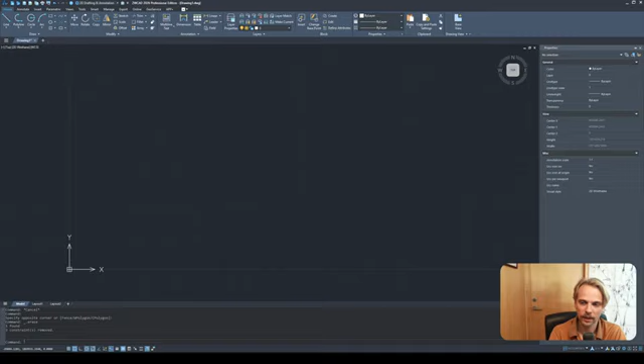It's quite similar, isn't it? The user interface, everything about ZWCAD is really, it makes it easy to transfer, and I know because I have done it. Even the command line, if I type in PL for polyline, enter, we're simply drawing a polyline. The snaps are the same visually, they act the same. Even the snap icons are quite similar, right? If I look at the different object snaps, here are the icons.

So transferring from one software to the other, it's quite seamless. Anecdotally, sending over DWG files created with ZWCAD to users of Autodesk products, I haven't had any issues with that. Neither have I had any issues receiving DWG files from Autodesk products to ZWCAD. It all works. Can't really think of anything that wouldn't work, which is great.

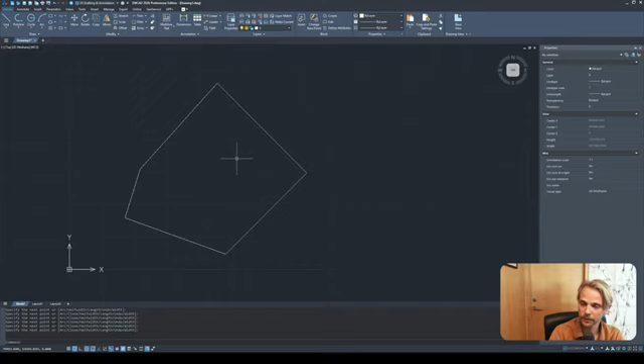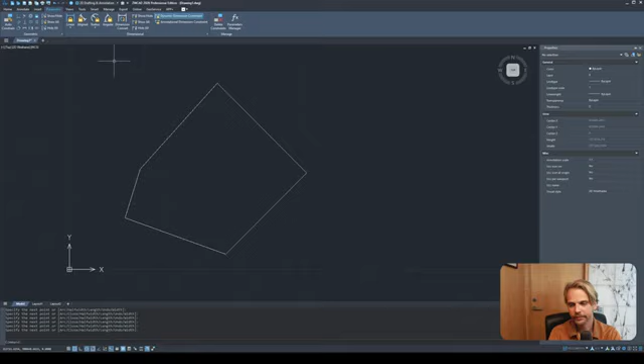When it comes down to more advanced features, there are two things I want to showcase. Feature number one is under the parametric tab, we have geometric constraints - different constraints that enable you to make any drawing parametric, where you can change the values and the geometry adjusts by itself. That is great, that's what we want sometimes. And another one actually comes from the previous course, the Rhino course for design documentation, where the biggest pain point was the lack of dynamic blocks. Of course, ZWCAD has dynamic blocks - they call it FlexiBlock. It's a dynamic block, right? So I'll be showcasing that as well.

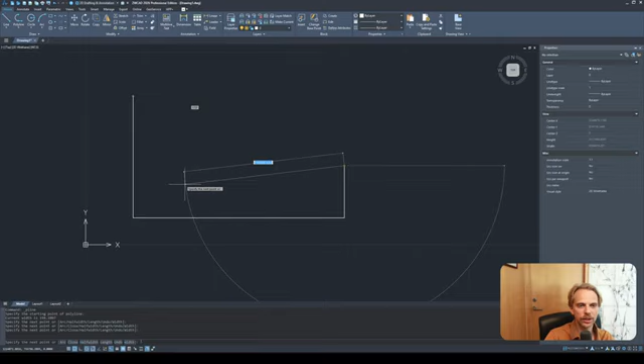All right, let's begin with me showing you parametric constraints and how those basically work. I will not do anything too fancy, too over the top - it's just to show it in a simple manner. So I'm going to be using a polyline, and I'll draw out some sort of an L-shaped looking thing.

You can see that my top here is not horizontal. I want it to be horizontal, so I will go into my parametric tab, and here under geometric constraints I can find the one that says horizontal, so I can force horizontality here. Bam, it's always going to be horizontal now.

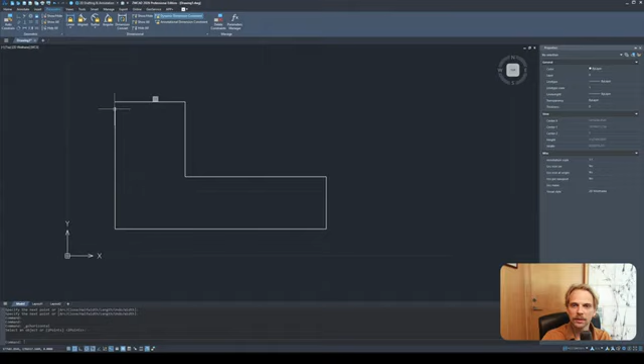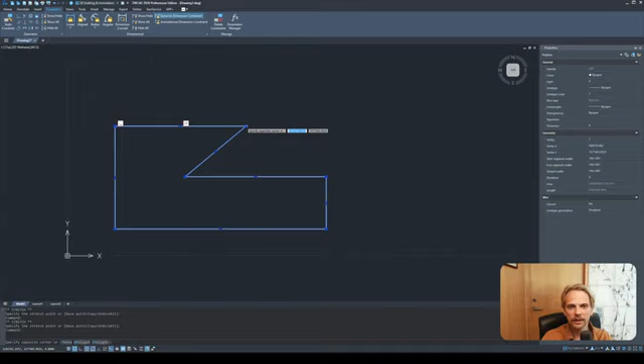Now there's a problem here because I forced this to be constantly horizontal, so it needed to make a gap here. I don't want this to be a gap, so I will use coincident right here between this point and this point. Now, no matter what I do, well, I can't even move this point, right? But yeah, I can move it down. So as I'm moving this point, this line will constantly stay horizontal, while this point will constantly be locked in.

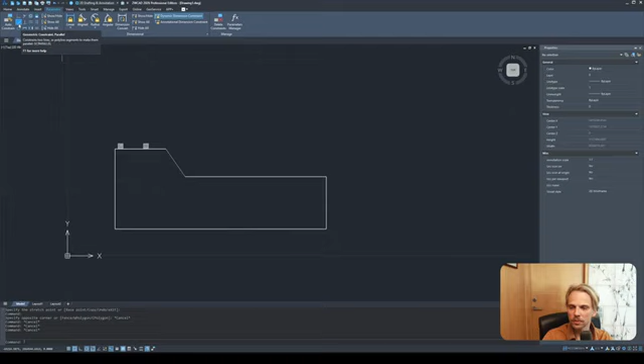So let's say I don't want this line to ever be non-parallel to this line. I want these two lines to always be parallel. I can use this parallel constraint right here, between this element and this element, right? So now these two are parallel.

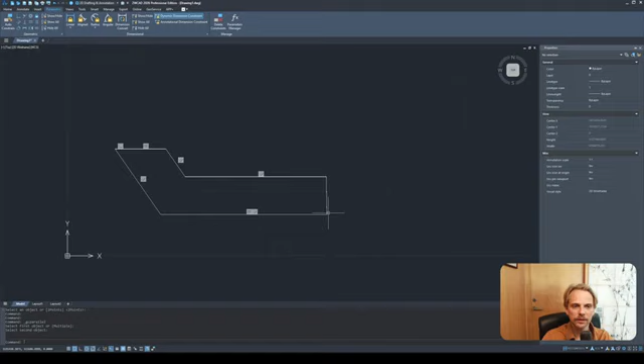I also always want the bottom to be horizontal, like that. And this line right here and the bottom, I always want it to be parallel, like that. And this line I want to be parallel with this line. Okay, there we go. So it became... let's try this again. Control Z from here to here. There we go. It matters which one you select first when you're applying the parallel, or any geometric constraint.

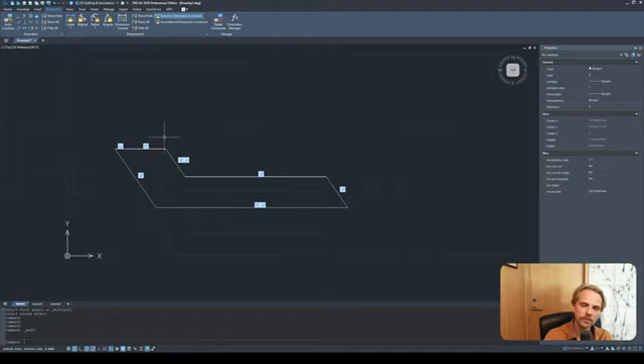But now what I have is a parametric model which will always react to any changes in exactly how you want, how you have described the relationship between the lines.

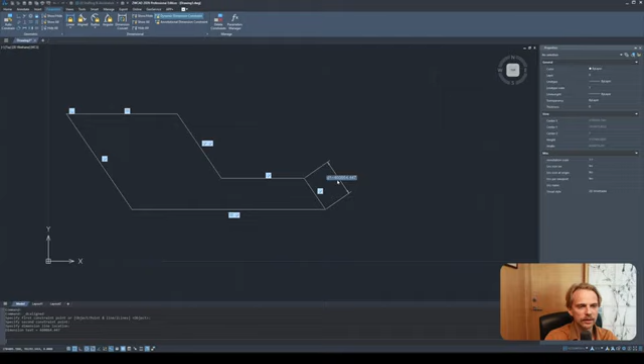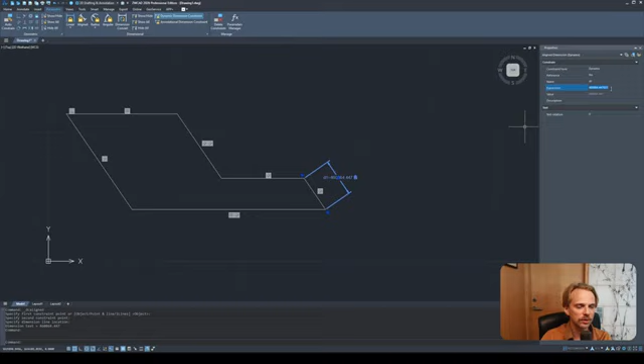You can also have this dimension, right? So for example, if I do an align dimension between here and here, that's my dimension 1, and you can see I'm off scale - this is a bad scale, doesn't matter. But here, if I just hit enter, I have my dimension here. I can actually go into its expression and write whatever dimension I want. So instead of 4, like I should have made a smaller one, this is 460,000 millimeters. Yikes. So instead of 460,000, what if I use 650,000, right? And everything applies, everything kind of works together.

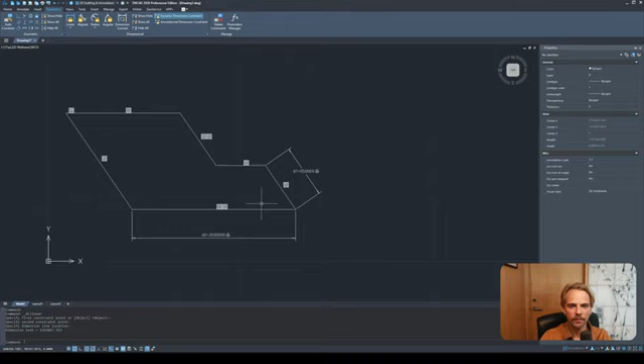Then I can create more dimensions. So I can do a linear dimension between these two points, drag that one out, and I can write whatever I want. In this case, it's 2,365,000. So if I do just 2 million, right? Now this dimension is locked. And basically you can just play around with the dimensions and you can have a fully parametric model where you're just working with these different values and getting different variations of it.

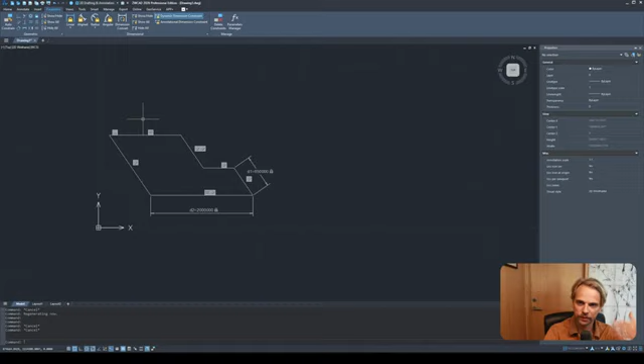Hopefully that makes sense. This is a very powerful tool, a more advanced tool, and I'm sure you already can think of multiple ways of how you can use that in your day-to-day work. So that's one thing - let's move on to creating a flexi block, a dynamic block.

All right, for the flexi block or dynamic block portion of this video, I will do a semi-tutorial. Semi-tutorial means that I will be going fast.

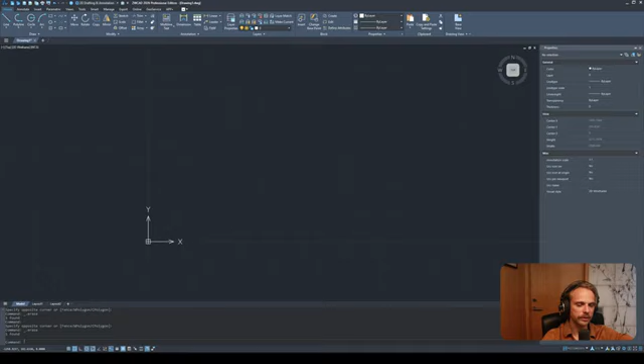I will be going faster than what I usually do during tutorials, just to showcase the whole process and explain it along the way. So it's not for teaching, but me explaining why I'm doing the things that I'm doing, so you can see both the output as well as the strengths of this flexi block dynamic block process or workflow.

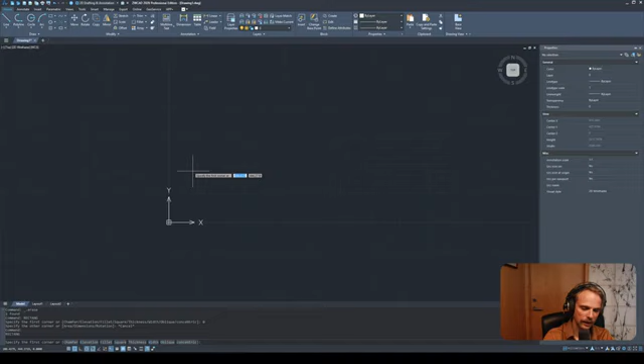So for this, we'll make a table. I will create a rectangle at 0, 0, 1,000, 1,000. So it's a 1 square meter, 1 by 1 meter rectangle.

I'll create preemptively a diagonal line, I will need it later. I'll make a circle, and the circle is going to be my chair, and the radius of it is going to be 250. I'll take the circle, move it up to 300 millimeters, so that there's a 50 millimeter gap here. The chair needs a backrest, like that.

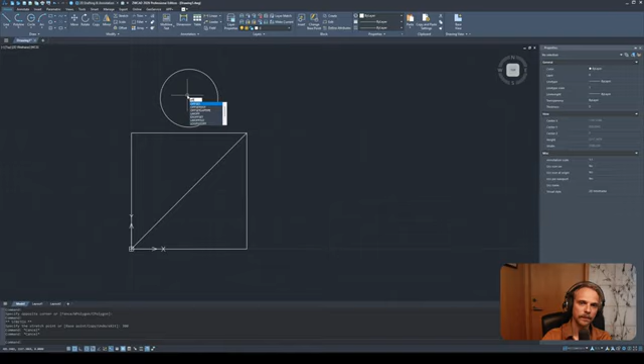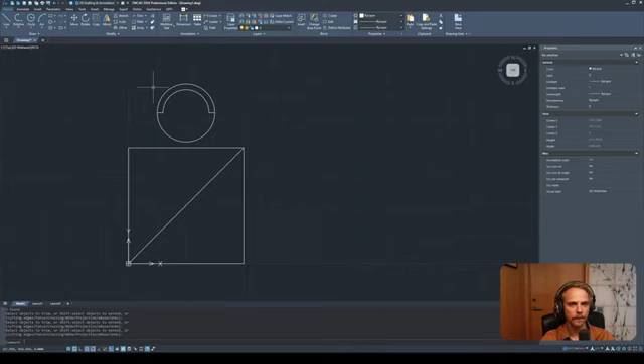So I'll just offset the circle inwards 50. I don't know why I did that, it was already 50. I have that, and I'll use the line tool, snap to quadrant, using quadrant snap to the circular quadrants, select all of the lines, trim, TR, enter, and trim away the excess, right? So now I have a chair.

Simplistic chair. Then for the table, the reason why I have this diagonal is if I select the chair now and I use array polar, I can use the midpoint of this diagonal to rotate or polar array the chair around the table. As long as I choose 4 items, it's going to be fine.

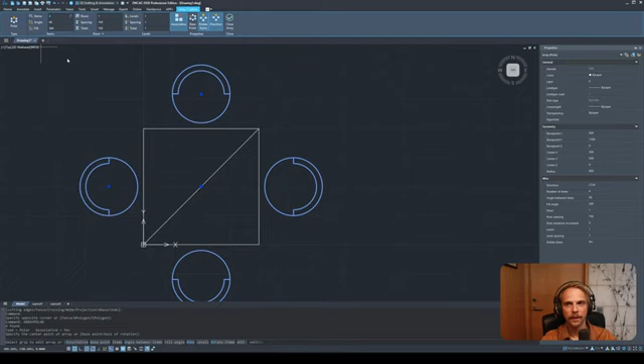Hit enter. Okay, there we go. And then the nice thing about arrays is that they are remembered in ZWCAD, so you can adjust the settings for them even after you have finished the tool. So if I want 8 chairs, I can just change it up, which is nice.

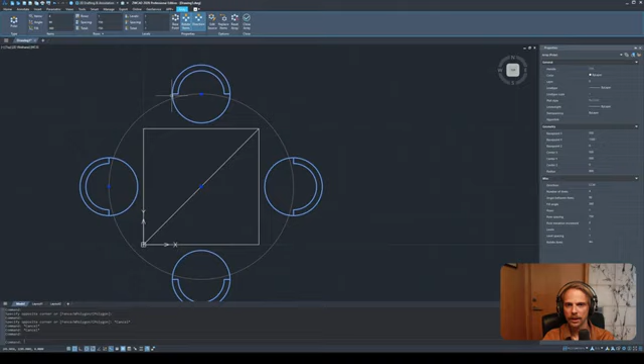Not for this tutorial or showcase, but for later. For now, I don't care about the arrays. I don't care about the array being editable, so I'm going to explode. And if you explode the array, you're left with just separate items. Don't need the diagonal anymore, and the corners are a little bit too sharp, so I will use fillet

on the corners with a radius of, I don't know, 50. I'm using 50 for everything, might as well use it for the corners as well. There is a fillet corners tool, I believe, that you could use, but whatever, it's just for corners, so I can do it manually. Okay, now with this, I can make it into a block.

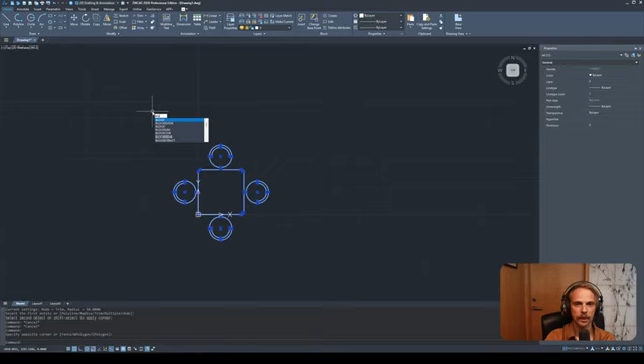So I'll type in block, and I'll call this table. Hit OK. For me, it says that it exists because I was testing it out. For you, it will not. And now this is a table block that has no parameters, no nothing.

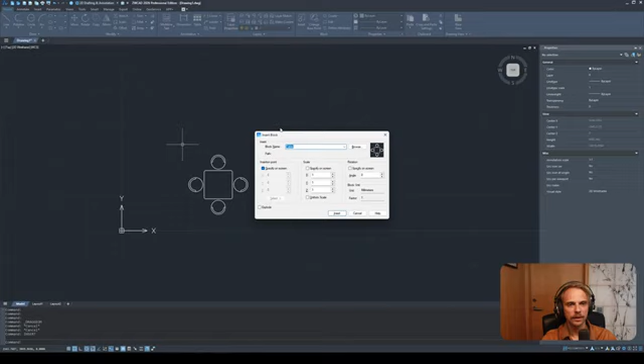All you can do with it is move it around. Move it around, there we go. You can insert, and there's the table. Insert, pop. You can place it, but scale it, rotate it, right? That works. Rotate, but nothing more. This is how it is in Rhino, right?

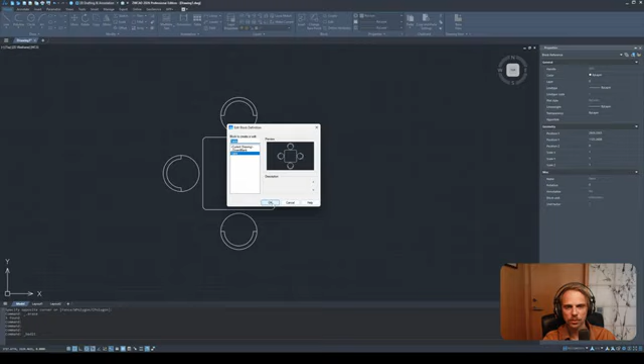But now it gets interesting. If I go in here into my table block, I just double click on it, or you can use the edit tool. If I go in here, I can start adding in different dimensions. And let me just move myself over here because you might need to see this.

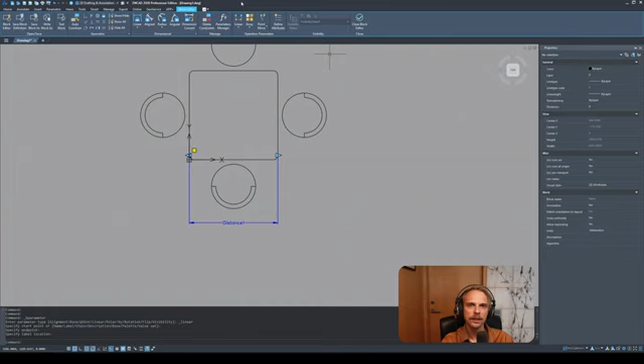So for example, I can add a linear parameter from here to here, which is the length of the table, right? Expand it up to here. It says distance 1, I don't like the name of it, so I'm going to go to the parameters manager here, and distance 1 I'm going to change to table width. Table width, and expression is set to be

1000, which is actually the current width of the table. That's great. If I close the block editor, save changes, and select the table here, you can see that now I have a parameter called table width, and it's 1000. It's grayed out, I can't change it, unfortunately. We need to do more editing here.

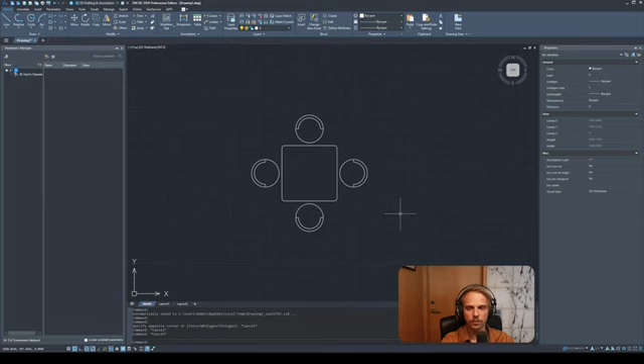If I double click this, I hit OK. First step is to actually—no, let's make it editable. So I'm going to expand this parameters tab where it says, in your case, it might say move; in my case it says array, it doesn't matter. But I'll choose stretch. And it's going to ask me what's the parameter that should be stretched, or the anchoring parameter. I'm going to use table width.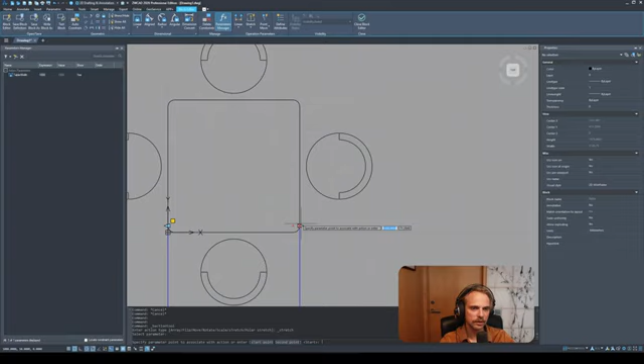Then it asks me to give it an area which you grab onto stretch, and the area is going to be this table edge, right? So I'm just going to—first of all, the point is here, and then it asks me for an area. So it's as if I'm drawing a rectangle like that.

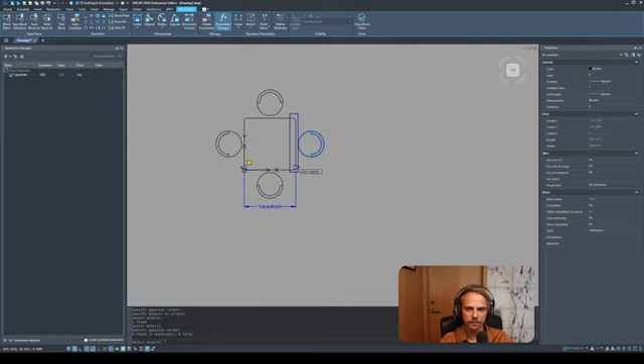And then it asks me what are the objects that you want to stretch. I want to stretch the chair so that as I'm grabbing this arrow and moving it, the chair kind of moves with it. And I also want to stretch the table, only part of it, so it's only going to grab these control points here and here, so it stretches the table. Once that's done, hit enter.

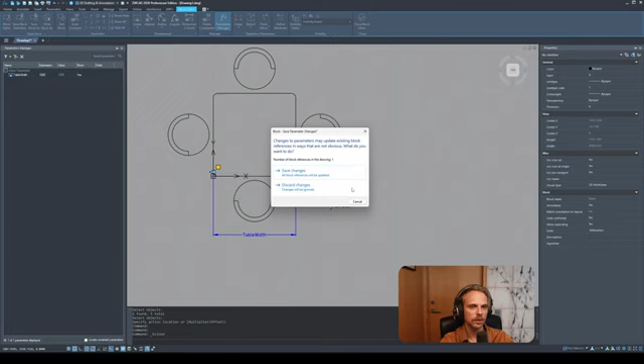It asks where to place the stretch icon if you want to edit this anytime later, so you just place it wherever. Close block editor, save changes, select this. Voila, you can now stretch this.

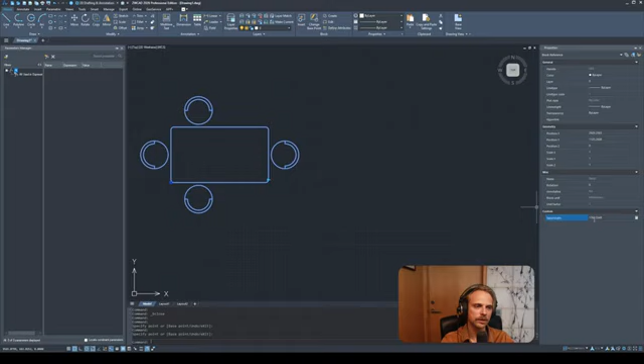As you're stretching it, you can see the table width parameter is also accessible now, and you can type in whatever number you want. The problem is that sure, it's stretchable, but there's not a lot of tables that have 1767.5549 millimeters in length. So it's a little bit annoying without any snapping.

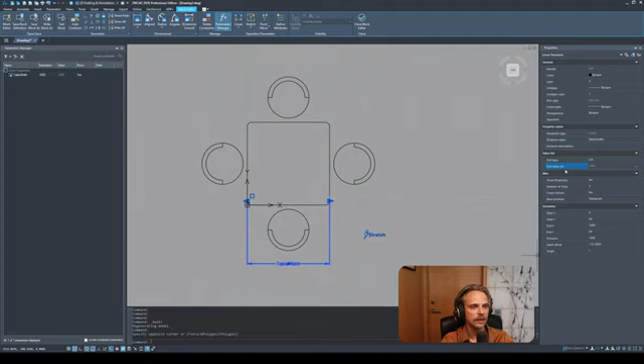So what we want to do is have a library of lengths that you use. I'm going to go back into the table settings, or table block editing mode, and select my table width parameter. Under the value set tab, instead of distance type none, I'm going to choose list. And for the list, it says 1000, but I can click on these three little dots here and add more.

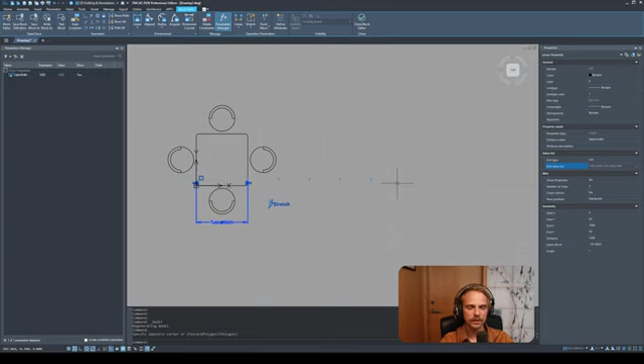So I'm going to add 1600, 1.6 meters, 2200 - using a step size of 600 - 2800, and then 3400. That's enough, hit OK. And you can see these tick marks appeared. Close block editor, save changes, select this - now it snaps to these values.

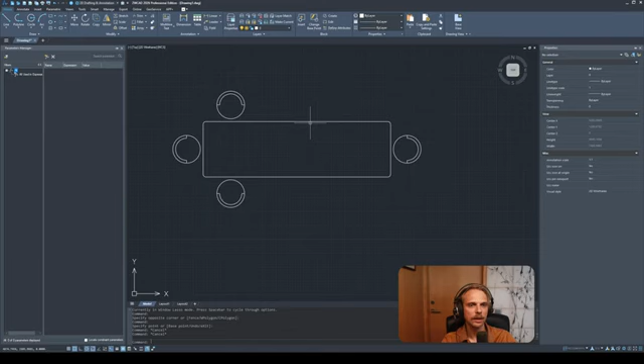Great, parametric - well, semi-parametric. Now the only thing left is making sure the chairs also get multiplied, so they follow with the snapping. So let's double click again, hit OK, and we need to add one more parameter or operation.

Instead of stretch, if I expand this, there's the array - that's what I was testing, by the way. So the array parameter asks us to select a parameter that influences the array, which is table width, and then asks to select the objects, which is going to be the chair here and the chair here. Those are the only two things that are going to be arrayed. Enter, and enter the distance between columns.

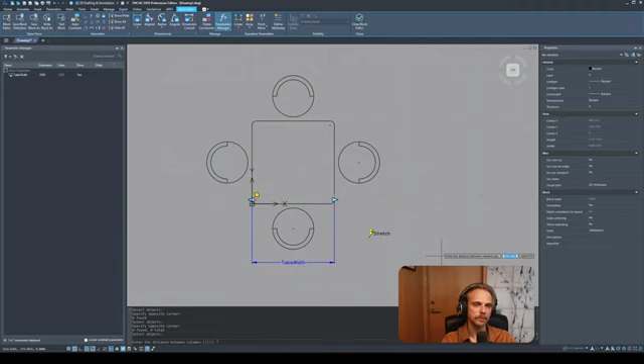So as the table is being stretched, this dimension is also being stretched. Basically, what's the step size between the array elements? I did a 600 millimeter step size, so I'm going to do that - 600, enter - and then all I need to do is just place it somewhere. Now I have access to this setting as well as this setting.

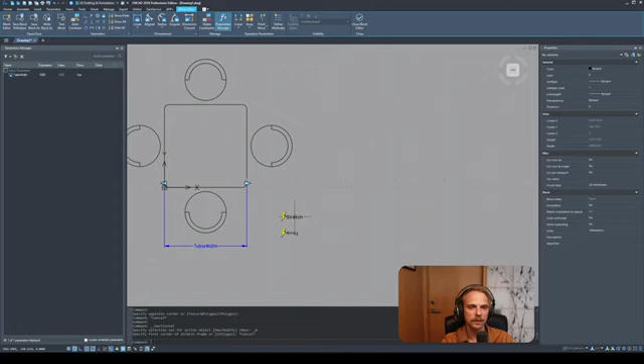Okay, close block editor. I think that's it. Save changes. Voila - 4, 6, 8, and so on. So we have a parametric

flexi block - it's a parametric dynamic block where you can choose from a list of values. You can also, of course, clearly do much more with it.

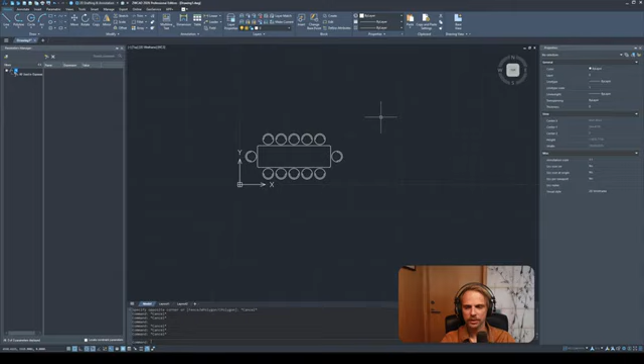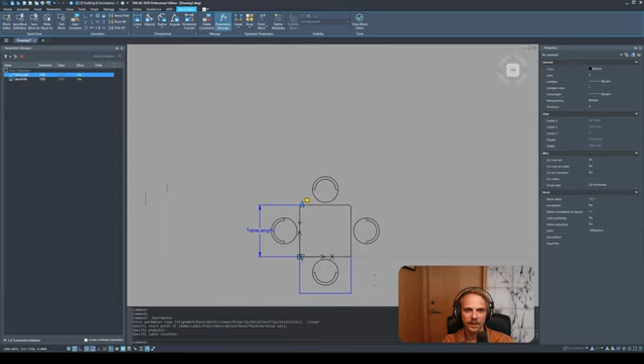Let's go back in here. You can add one more linear parameter from here to here and call this table - oh, then it's table length. It's awkward, my bad, it should have been different. This should be table width, and this should be table length. This should be table width, but it is what it is.

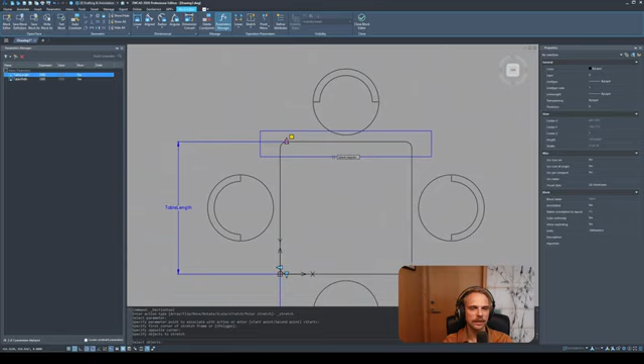So this parameter, and then I can apply another stretch for this table length. I can use the same kind of logic - oh, that's my bad, okay we'll make this a smaller layer. Select objects, so we stretch this and these guys like that. I believe that's it, enter.

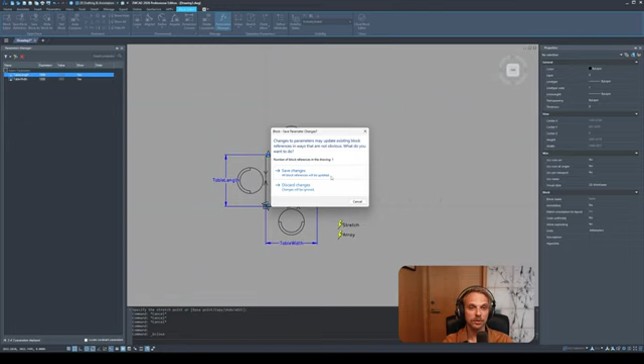Place that stretch, and I'll just place it over here, and I'll edit it, so I can change the rectangle to be here. There we go, something like that. And I believe if I close block editor, save changes, now I have the possibility to increase the size of the block

like that, or decrease it. And clearly, this circle does not react to the midpoint of the table, and you could make it react, but this is besides the point. The point is that you can make everything parametric, which is great. So that's kind of it about the flexi block - that's what I wanted to showcase for this video, but there is still one more thing.

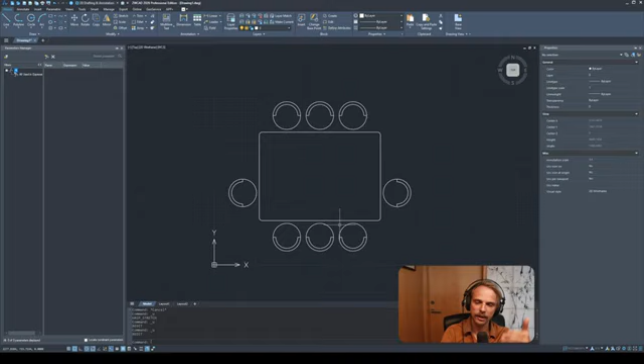Recently, for 2 years now, every year when there's new features of ZWCAD coming out, I always cover them. I wanted to do that this year as well, so we keep track of the development of the software, because I feel like it's important to see if development is stagnating, or if the developers are continuously pushing out new things compared to the Autodesk stuff that is currently stagnating quite heavily. Hopefully ZWCAD will not follow in those footsteps. So let's jump to feature review.

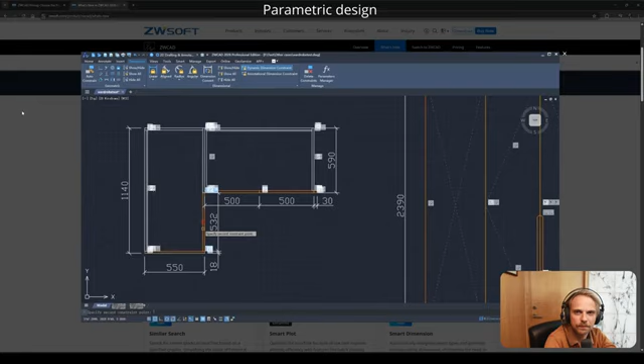I went through all of the features of the new ZWCAD 2026, and there are a few I want to show you that are getting me excited about the new release. So the parametric design one, I already showed you this, but for those of you who don't have a good imagination, this is a much better showcase of the parametric constraints and whatnot. Imagine having a drawing that's all tied together and it adjusts just from you typing in required measurements. Quite a powerful workflow, quite a powerful tool.

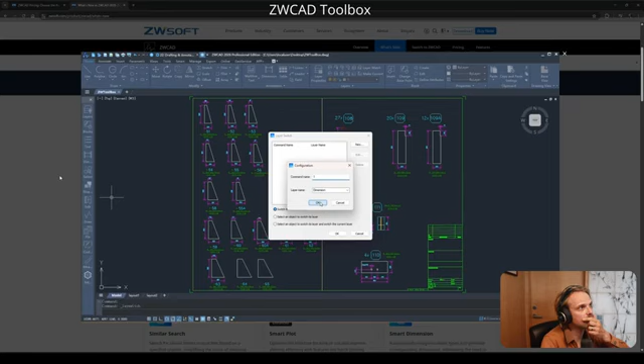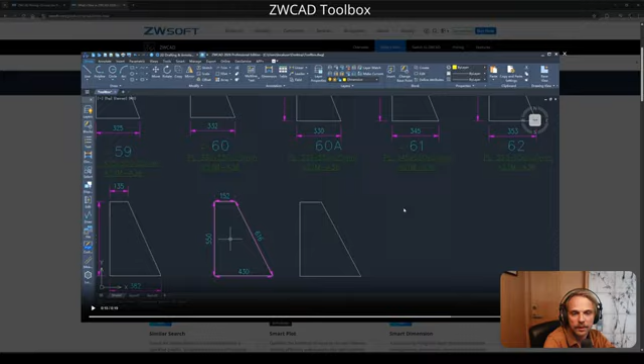This is really nice. Then we have the ZWCAD toolbox, which is basically a lot of small tools that enable better quality of life. For example, let's skip back a bit - just a tool that automatically applies dimensions with specific gaps to an object altogether. And it's not just linear, it's also aligned dimensions. Really great tool that just saves you time. So that's the toolbox, and they keep developing the toolbox. I like to see that.

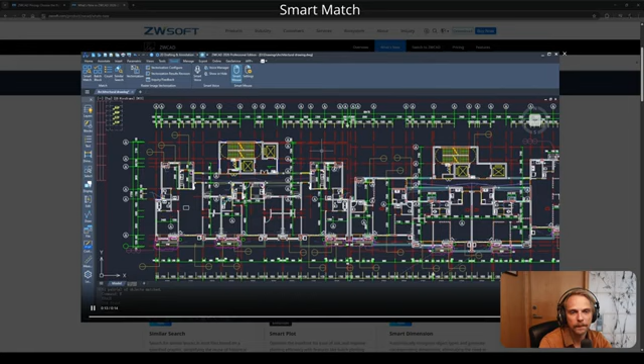Smart Match is great when you need to find all of the same objects, like same blocks or so on, and it just finds all of them. It doesn't seem like this is a block search - it seems like it just finds lines that look the same. In this example, the person just chooses a few that he unselects and then deletes all of the rest. So quite a nice optimization in terms of speed and finding similar things.

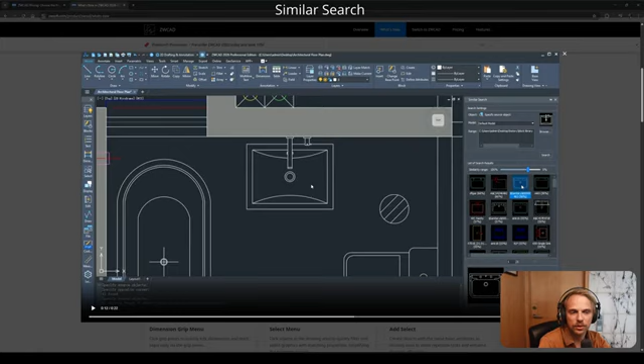Speaking of similar search, this is for blocks, and this one is, if I remember correctly, AI. You basically have a block library, you choose a sink, say find me all similar ones to this sink. It goes through your library and finds all the sinks that are similar, and then you can just fetch a new one and replace it. So it basically has computer vision where it understands that sink was similar to this one. AI is not taking over, but is slowly being injected in our tools. I don't know how I feel about that. I'll tell you in 5 years.

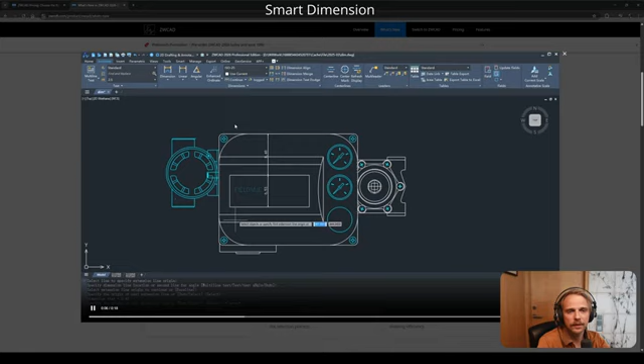Smart Plot was great, but I'm going to skip ahead. Smart Dimension is actually really good - no matter what kind of dimension you add, the software understands what type of dimension it should be, depending on what you're anchoring to. It's quite nice, quite nice.

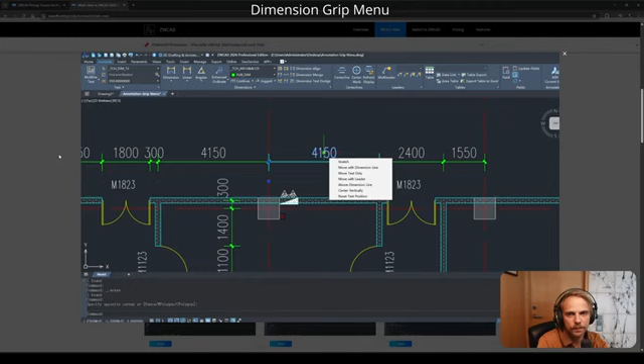And then lastly, we have the add grip feature. Now you can actually define how the text is moved away from the dimension line. Just a nice improvement altogether. So a lot of incremental improvements, some really major ones, such as similar search, smart match, and so on. These will help out quite a bit. It seems like there's a lot of automation released in this version of ZWCAD, which is great, which is what I want to see.